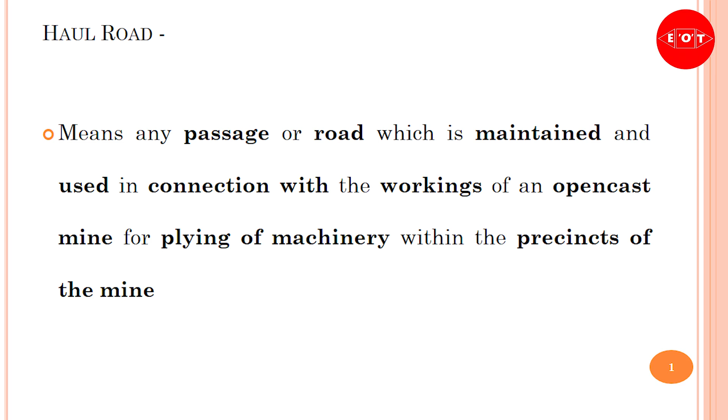Let us see some of the recommendations of the DGMS regarding the conditions of haul roads. Under the new regulation, a haul road has been defined. Haul road means any passage or road which is maintained and used in connection with the working of open cast mines for plying of machinery within the precincts of the mine. So this way they have given the definition also.

As regards the condition of haul roads is concerned, this is a compilation of various circulars and recommendations issued by DGMS. These have been compiled into about 11 points, and all of them are important as far as the condition of haul roads is concerned. We can expect a question on these conditions already issued by DGMS.

The first condition reads: all roads for trucks, tippers, dumpers or other mobile machinery shall be constructed to suit their load capacity. They observed that in many mines, formerly they used to operate with 50-tonner dumpers, and subsequently shifted to 100-tonner dumpers, which had an adverse impact on the maintenance of the haul road. So load capacity means the condition of the haul road shall suit the load capacity of the vehicles plying on it. It is very, very important.

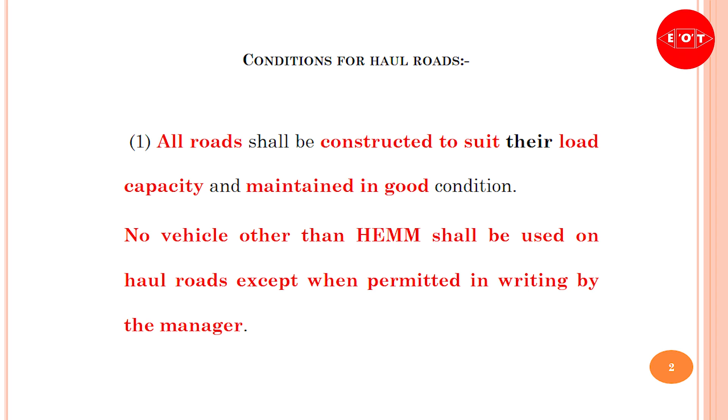Not only construction, but haul roads are to be maintained in good condition. Another important point is no vehicle other than an HEMM shall ply on a haul road, except at some designated points where light vehicles are permitted to cross the haul roads, with certain precautionary measures also to be adopted.

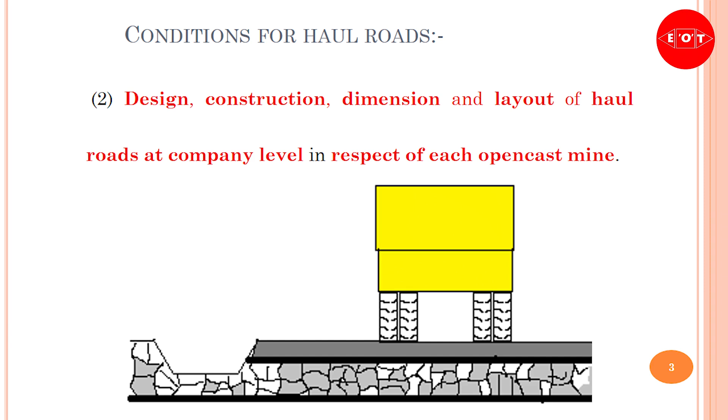The second point is regarding the design, construction, dimension and layout of haul roads. The DGMS recommendation is that whenever we lay down any design, dimensions and layout of haul roads, it shall be laid down at company level in respect of each open cast mine. We know what company level and site level mean. The site level is restricted to the conditions or specifications of a particular site only. But company level is related to all the mines under that company.

If there are more than one mines, then all haul roads should provide one-way traffic, and the width of the haul road shall be at least equal to the width of the largest machine plying on the haul road plus 5 meters. But if one-way traffic is not practicable, as could be the situation in some mines, the recommendation is that the width should be at least 3 times the largest dumper plying on the haul road, plus 5 meters.

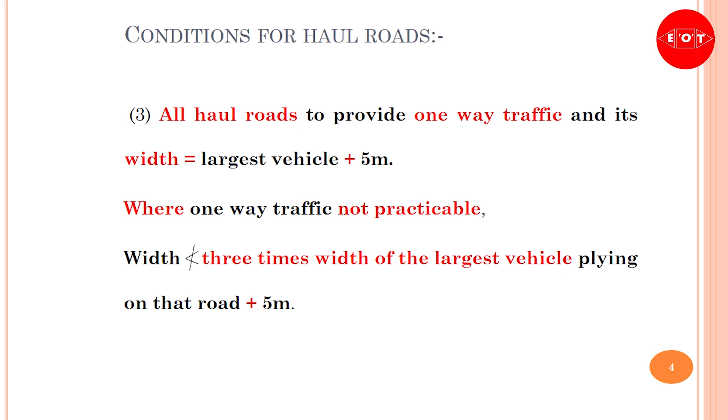This recommendation is based on the fact that the probability of head-to-head collision on a two-way haul road is more, and hence there should be sufficient width on such haul roads to maintain safe clearance between the to-and-fro traffic. The fourth point is very, very important.

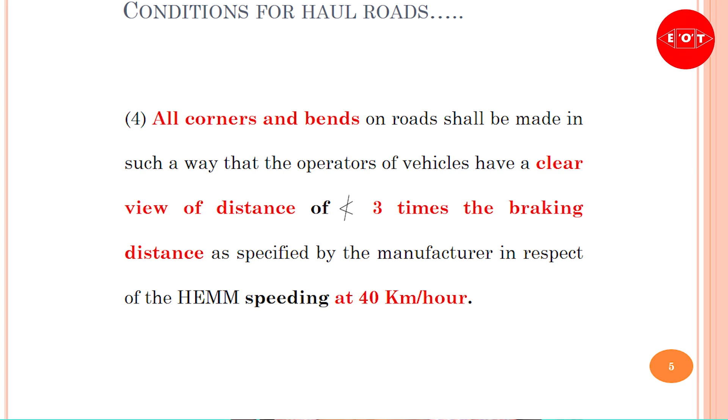That point concerns all corners and bends, because most accidents take place on corners and bends when the operator cannot control his vehicle. So all corners and bends on roads shall be made in such a way that operators have a clear view of a distance not less than 3 times the braking distance as specified by the manufacturer in respect of HEMM speeding at 40 km per hour. We can very much expect a question on this also. So it reads: all corners and bends shall be so designed that the operator shall have a clear view of a distance not less than 3 times the braking distance. We know that the braking distance is specified at every speed by the original equipment manufacturer.

That braking distance is verified by the engineer also at the mine, and a proper record is also maintained of all these things. This way we have to ensure the clear cut distance, and at times due to local situation it may not be possible to give a clear view of 3 times and all that. So in that case there is a provision.

What is that provision? If it is not possible to ensure visibility for that distance, then two separate roads shall be provided at the corners and bends, but the width shall not be less than 2 times plus 3 meter of the largest vehicle plying on the road. So when we are not in a position to give a clear view of 3 times the braking distance, we can have two separate roads, with width not less than 2 times plus 3 meter of the largest vehicle, a strong divider at the center, and adequate lighting and arrangement for reflectors.

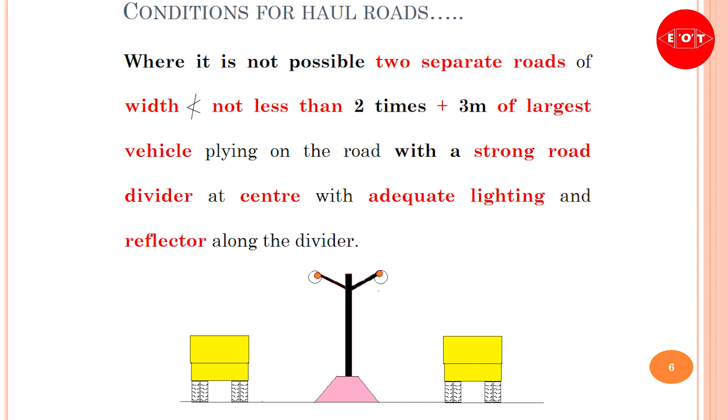Then fifth point is that as far as condition of haul road is concerned, no road shall have a gradient steeper than 1 in 16. Formerly they used to permit ramps of 1 in 10 and all that, but now they are also permitting ramps, though with some restriction. So gradient shall at no place be more than 1 in 16, because the more the gradient, the more difficult it becomes to control the vehicle.

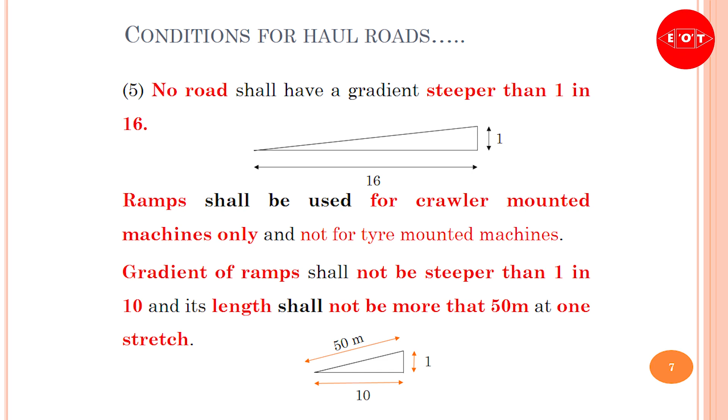As regards ramps, they say ramps shall be used for crawler mounted machines only. Tire mounted machines shall not be used on ramps. A gradient of ramps shall not be steeper than 1 in 10, and its length at one stretch shall not be more than 50 meter. So this is the condition.

Then the sixth condition regarding haul roads is that where any road exists above the level of the surrounding area - because we have seen incidents of dumpers falling from the upper bench to lower bench, from higher altitude to lower altitude, and many fatal accidents have taken place - to prevent that, whenever such a situation exists, the road shall be provided with a strong parapet wall or embankment, and the dimensions of the embankment have also been suggested by DGMS via this circular.

From an examination point of view, all these dimensions can very much form a simple question, but we should not miss the correct answer. What is the condition? Width of the parapet wall or embankment at the top shall not be less than 1 meter. That is one condition. And the width at the bottom, because the embankment itself needs to be stable - whatever parapet wall or embankment you are giving, it should be stable - so the width at the top shall not be less than 1 meter, and the width at the bottom shall not be less than 2.5 meter.

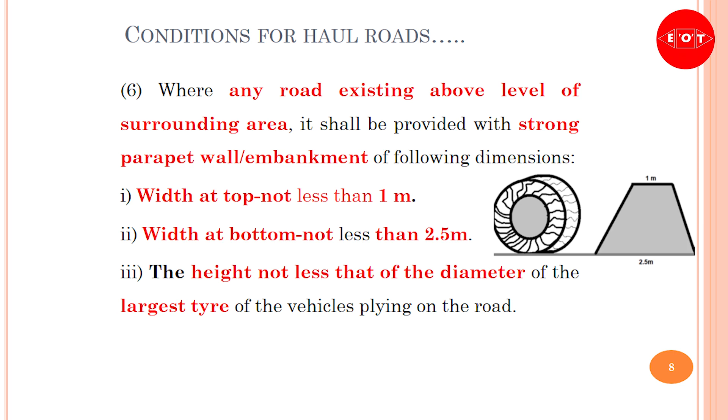As far as height is concerned, please remember the height shall not be less than the diameter of the largest tire of the vehicle plying on the road. This is the most important condition. So whenever we are giving some protection or embankment to arrest a vehicle, the condition is that the height of that embankment or parapet wall shall not be less than the diameter of the largest tyre of the vehicle plying on that road.

One important thing mentioned is that mere dumping of mud or overburden shall not be treated as a strong parapet wall, because at times there is a likelihood that we people at the mine may think we can dump a truck or two and be rest assured that no vehicle is going to jump down. But DGMS has clarified that this will not be considered a strong parapet wall. So we need to construct a strong parapet wall of the given dimensions.

Condition number 7 is that a separate haul road shall be provided for light vehicles, as we know that we need to go for inspection using light vehicles, and the maintenance crew, etc., also need to visit the mine in light vehicles and all that.

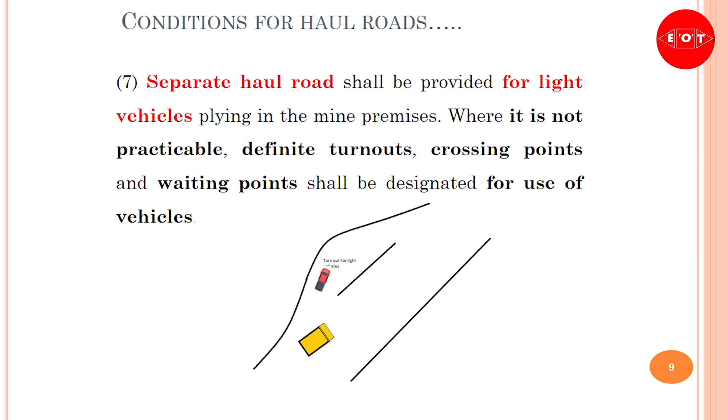Light vehicles are going to enter the mine, and it won't be very much possible to continuously give a separate road for the light vehicles. There are going to be situations when the light vehicle crosses the haul road or travels on the same haul road wherein big HEMM are also plying. So they have suggested definite turnouts. You have to provide a separate road for light vehicles as far as possible. When it is not practicable to give a separate road, you have to provide definite turnouts, crossing points, and waiting points for the use of the vehicles, provide traffic signals, etc., and frame standing orders from that point of view, because many fatal accidents have taken place where officials have lost their lives on haul roads due to collision with higher dumpers or higher capacity vehicles.

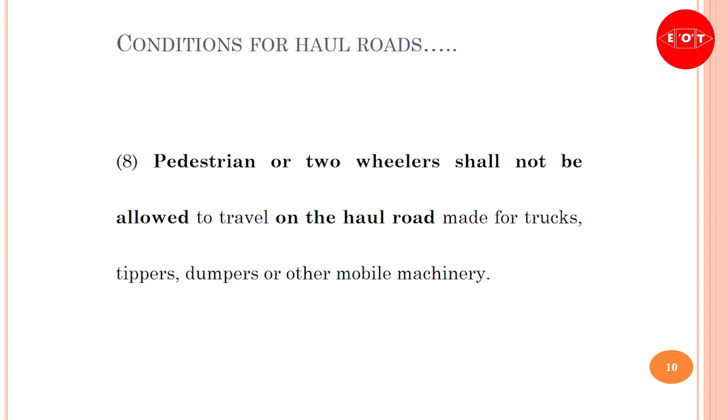Then pedestrians and two-wheelers. This is a very big issue as far as our mines are concerned, particularly whenever there is a village nearby or some public road passing through. There are many incidences when pedestrians or two-wheeler drivers occupy the haul roads, and we need to be very careful for that. Pedestrians or two-wheelers shall not be allowed to travel on the haul road made for trucks, tippers, dumpers, or other mobile machinery. This instruction is to be very strictly followed.

Then condition number 9 is related to road signs with fluorescent paint. We know that we are going to operate the mines 24 by 7. At times there are situations of fog and low visibility, or the dust is more and all that. In such situations, the road signs with fluorescent paint guide the operator to keep the vehicle on track. So at every turning point, in particular, road signs with fluorescent paint shall be provided for guidance of drivers, especially at night times.

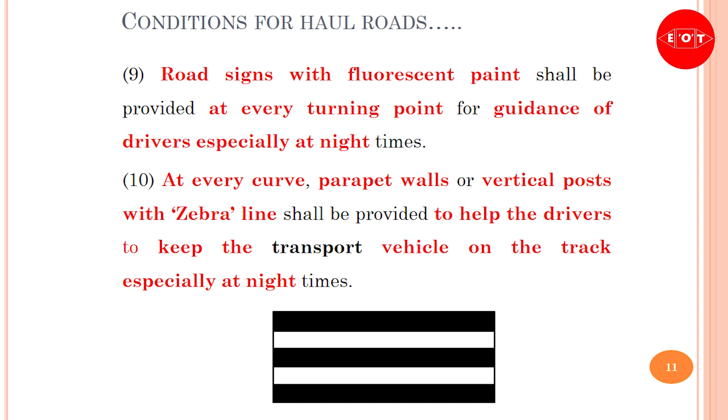Then condition number 10 reads like this: at every curve, parapet walls or vertical posts with zebra line shall be provided to help the drivers to keep the transport vehicle on the track, especially at night times. Whenever we are having a curve or a parapet wall, then vertical posts with zebra line shall be provided to help the drivers keep the transport vehicle on track.

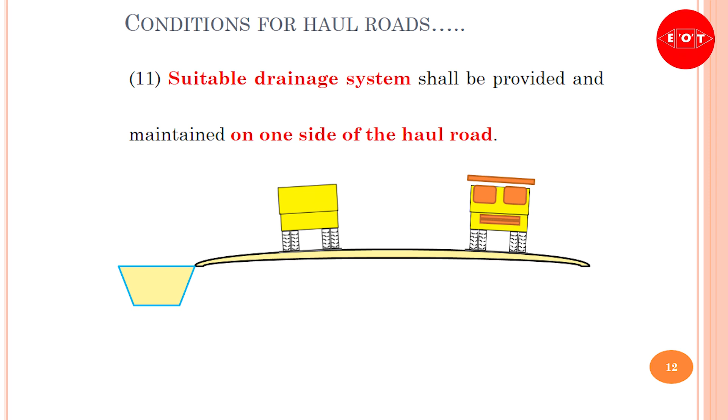Then number 11, because we have seen by experience that if the drainage arrangement on a haul road is not proper, maintenance of the haul road becomes very difficult. So point number 11 says a suitable drainage system shall be provided and maintained on one side of the haul road. These are some of the conditions which we must keep in mind, because these conditions can become a part of our questions whenever we are studying the mine workings.

So we were studying about the mine workings under Regulation 106, and you know that under the MMR not much has been given. That was the reason we covered some of the circulars wherein very important information has been circulated by DGMS. Now let us continue our study of the Metalliferous Mines Regulation.

The next important regulation from examination point of view is Regulation 108, which is regarding the powers of inspectors. Why are we supposed to know, as a manager, the powers of the inspector? We are supposed to know the powers of the inspector so that we shall give due respect to whatever instructions we receive from the inspector. We need to know what the powers of the inspector are. If you carefully read Regulation 108, you will find that this regulation is no less than Section 22, wherein the inspecting authority has the power to stop the work over there. Now let us carefully see what this provision reads.

Regulation 108, powers of inspector. If the provisions of Regulation 106, which we just discussed, meaning the chief inspector has granted us exemption on certain conditions, and if those conditions that were provided and expected from us to be observed are not followed, then in that case, if that is not complied with, the regional inspector may give notice in writing to the owner, agent, or manager, requiring him to take such protective measures within such specified time, similar to Section 22.

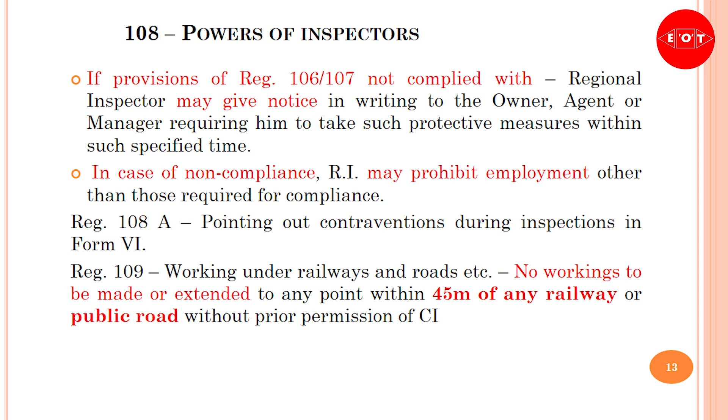Then regulation 109 is regarding working under railways and roads, meaning public roads, etc. It is a simple provision: no workings to be made or extended to any point within 45 meters of any railway or public road without prior permission of the chief inspector. So here the 45-meter part is important from our examination point of view.

Regulation 111 is one more regulation, working near mine boundaries. The provisions are that the owner, agent or manager shall have fixed boundaries of the mine, and these boundaries shall not be changed except with the permission of the chief inspector. And you know that whenever we change the boundary, we have to send notice to the chief inspector, the inspector, the district magistrate and all that. So under regulation 111, the owner, agent or manager shall have fixed boundaries.

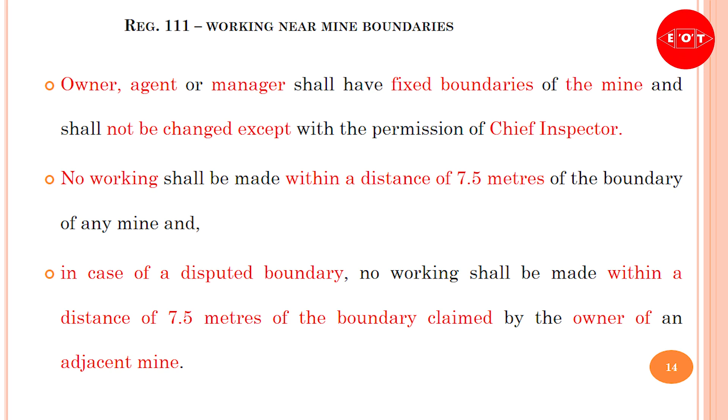Now here we need to again revise our concept about a mining lease boundary and a mine boundary. Mining lease boundary is the area granted for mining under the Mineral Concession Rules, whereas a mine boundary is the area fixed by the owner, agent or manager of a mine under regulation 111 of the Metalliferous Mines Regulations 1961. So this is the difference between the two.

Then, in working near mine boundaries, another provision is that no working shall be made within a distance of 7.5 meters of the boundary of any mine, and in case there is a common boundary and some dispute, no working shall be made within a distance of 7.5 meters of the boundary claimed by the owner of the adjacent mine.

Another provision, or rather it was issued via circular, and we should keep it in mind since we work in open cast mines. Working in river beds: at times there are river beds where during the dry seasons there is no water and there is precious mineral. So DGMS had in the past permitted open cast working in these river beds with the prior approval of the inspectorate, but the condition is that open cast work in the bed of a river may be carried out from 1st November to 31st May of the next year. So this is one of the things you should keep in mind.

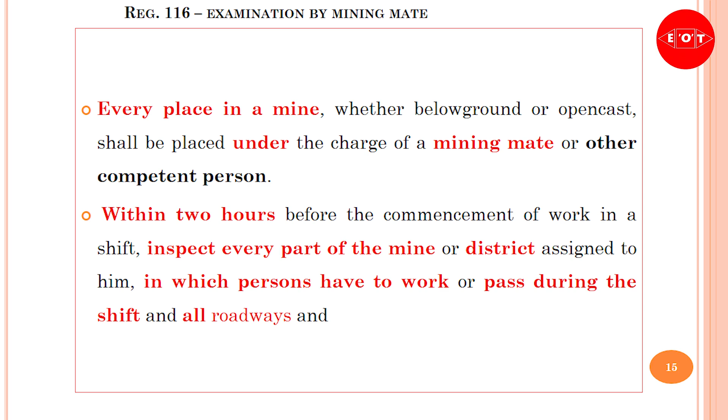And this mining mate who holds charge of that working place shall, within 2 hours before the commencement of the work in a shift, inspect every part of the mine or district assigned to him in which persons have to work or pass during the shift, and all roadways and working places where work is temporarily stopped. You know what a disused or unused working is. These are the workings where the work has been temporarily stopped.

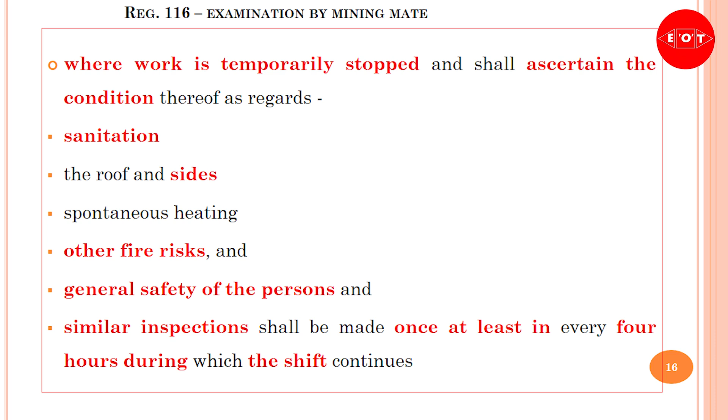So this mining mate or other competent person is expected to inspect that place also which has been temporarily stopped and ascertain the condition related to sanitation, then whether the sides are safe and secured or not, whether there is any other fire risk or not, and generally so far as the safety of the persons is concerned. And similar inspection shall be made at least once in every 4 hours during which the shift continues. So this also is the condition under regulation 116.

So if a question appears related to regulation number 116, then you must remember that within 2 hours the mining mate is supposed to inspect all the travelable parts and wherever persons are working, and similar inspection has to be done again once every 4 hours during the shift.

Regulation 119. This regulation relates to precautions against fire. Now we know that fire and inundation come under major hazards. Similarly, slide or slope failure is also one of the major hazards. So precautions against fire assume importance from our examination point of view.

Not much has been given in regulation 119, but we need to go through some of the circulars and make ourselves thorough with the AFDSS, automatic fire detection and suppression system. We can expect a question or two on AFDSS. Now let us see what the provisions under regulation 119 read. These are precautions against fire.

So one important provision: no oil, grease, canvas or other inflammable material shall be stored in any mine except in a fireproof receptacle, because we know that we are extensively using inflammable oil and diesel. So the storage of that is very, very important and it must be stored in a fireproof receptacle as per regulation 119.

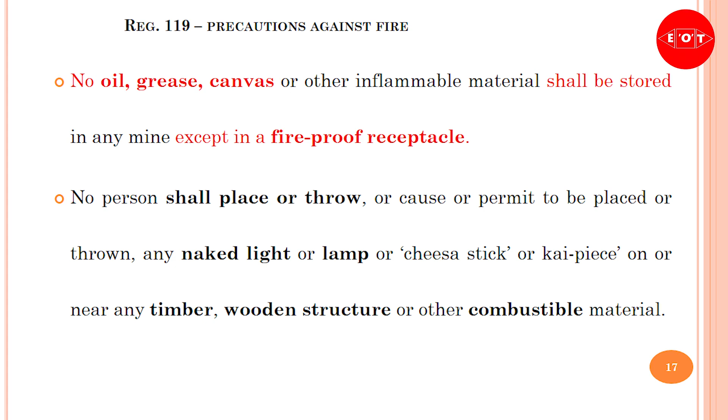Then another condition is that we know fire risk arises whenever some person inadvertently throws any lit matchsticks on material which is inflammable, where inflammable material has already been stored in huge quantity. So no person shall place or throw, or cause or permit to be placed or thrown, any naked light or lamp or cheesa stick or kai-piece on or near any timber, wooden structure or any other combustible material. This is the condition.

Then regulation 120. Now we need to be very much prepared if any fire takes place. So precautions after a fire has broken out. In case of underground mines, this is very, very important, but in opencast mines also, if a fire has broken out, certain precautions are to be taken. All persons except those required to deal with the fire shall be immediately withdrawn. No person shall be admitted in the mine until the fire or heating has been extinguished or effectively sealed off and the mine has been declared to be safe.

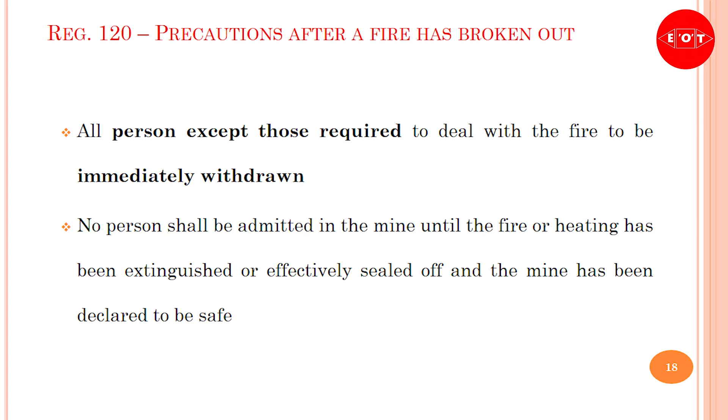Now these two things are very, very important. Whenever we are dealing with fire or conducting any emergency operation, we restrict the entry to limited persons whose attendance is very important. Regulation 121 is regarding equipment for firefighting, and we know that we need to maintain elaborate firefighting arrangements at our mines to deal with any emergency.

The regulation reads that a sufficient supply of clean and dry sand, incombustible dust in buckets, or a sufficient supply of portable fire extinguishers shall be provided. Where is it to be provided? At every entrance to a mine or district. Normally, wherever the check post is, where the security guard is checking gate passes and helmets, there itself we maintain a stock of fire extinguishers, which is as per regulation 121.

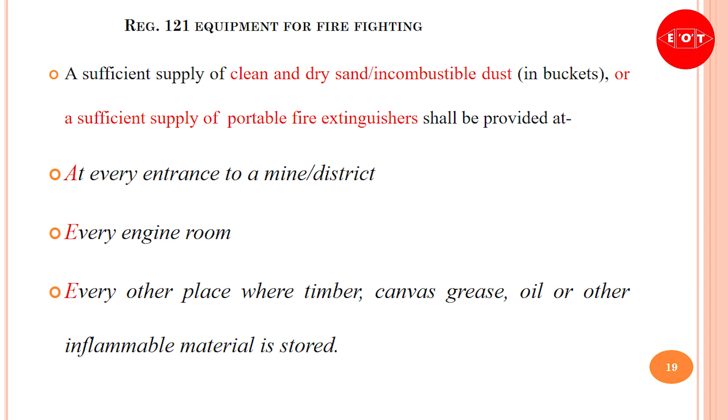Every engine room, if you have a haulage engine or any other such engine, you have to be ready with fire extinguishers over there. And every other place where we are storing inflammable material, timber, canvas, grease, oil, we need to provide fire extinguishers. And the most important thing to keep in mind is the soda acid type.

We know that there are three types of fire extinguishers, known as A, B, C. These are the ABC type fire extinguishers. And the D type relates to fires which involve inflammable metals. So A, B, C, D we can say, but mostly we treat fire extinguishers under the three categories only, which are A, B, and C.

And these A, B, C, if we want to remember what type of extinguisher is used where, you can remember the three states of matter. We know that the three states of matter are solid, liquid, and gas. So solid means any fire involving solid material like paper, wood, and all that, so A type extinguishers are useful. Whenever inflammable liquid is involved in the fire, then B type, and when gases are involved, then it is C type. And for metallic ores, if they catch fire, it is the D type.

But many have a confusion whether there is any E type extinguisher for electrical fires, but that is not there, because electricity is considered as the source of ignition and nothing more. So if electricity is the source of ignition, the material being burned could be solid, liquid, gas, or metal only. That is why we don't have any E type extinguishers. It is only ABC type extinguishers.

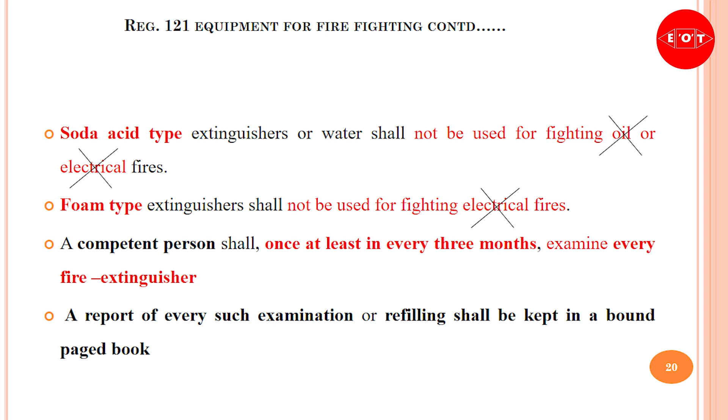Most important thing, we need to be always prepared, because we don't know where the emergency will arise. So for that purpose, we have to designate a competent person who shall at least once in every 3 months examine every fire extinguisher so provided, and shall discharge and refill it as often as may be necessary to ensure that it is in proper working order. Of course, this depends on the refilling instructions given by the original equipment manufacturer. And the report of every such examination shall be maintained in a bound paged book, signed by the person making the examination and countersigned by the manager.

In most of the vehicles we are using, we find that many incidents of fire in transport vehicles are taking place. The reason is that mechanization has increased, there are higher mining capacity vehicles, they are using high pressure hydraulics, and the motors are high amperage motors, accompanied by continuous operation resulting in heating of the equipment. There are constant vibrations and stress, and the mining environment is rugged, with dusty, muddy conditions. Malfunctioning and faulty maintenance at times may also pose a serious fire hazard to these equipment.

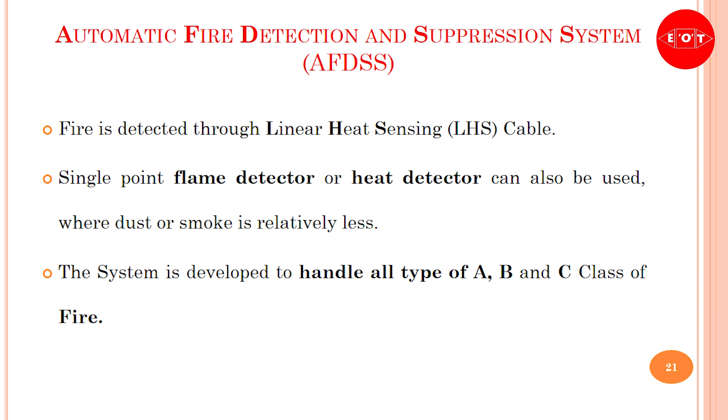So what we have found is this situation can be prevented by the installation and use of AFDSS. What is AFDSS? Automatic Fire Detection and Suppression System. On all diesel equipment, a semi-automatic or automatic dry chemical fire suppression system may be provided, is the suggestion of DGMS. Let us quickly understand the working and principle of this system. In AFDSS, fire is detected through linear heat sensing, known as LHS cable. A single point flame detector or heat detector can also be used where dust or smoke is relatively less. The system is developed to handle all A, B and C class fires.

This system basically consists of a control panel, an alarm speaker, and an LHS cable known as the sensor cable. Then it is pressurized, this is very important. The suppressant is pressurized up to 4 kg per centimeter square, or 60 psi. The main cylinder dry chemical powder is mono ammonium phosphate, with a CO2/N2 gas cartridge as expellent gas at 40 kg per centimeter square, which is 600 psi. There is a distribution system, a hose assembly, nozzles, and power supply, and if the coverage area is more, we can increase the LHS cable and the pressurized main DCP cylinder quantity.

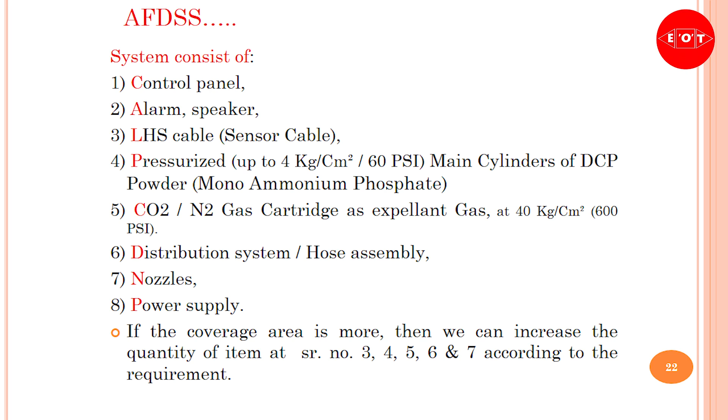The CO2 N2 gas cartridge quantity can also be increased, and the distribution system and nozzles etc. can be tailor made. The smallest system in this AFDSS contains one cylinder of 10 kg of dry chemical powder and 1 kg of CO2 as an expellant cartridge, along with 6 nozzles.

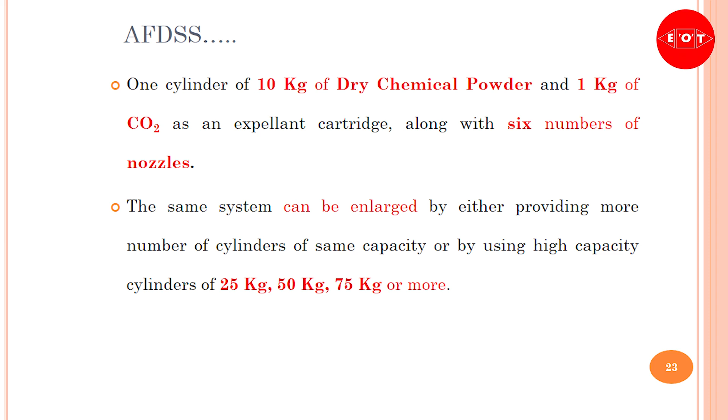The same system can be enlarged either by providing more cylinders of the same capacity, or by using high capacity cylinders of 25 kg, 50 kg, 75 kg or even more. Similarly, the number of nozzles can also be increased to 8, 12, 16 or more to cover a larger area, because these nozzles are pre-decided and directed towards the expected hot parts which are likely to initiate the fire.

These nozzles are directed towards those areas, and whenever the linear heat sensing cable diagnoses an increase in temperature, it actuates automatically, and those nozzles start showering the dry chemical powder on the areas which have already been predetermined.

The speciality of this system is that it works both automatically as well as manually, because we need to be ready with manual arrangements also. At times, if the automatic function has some snag, it can be overpowered by the manual system, which should override the automatic system. This provision is always kept.

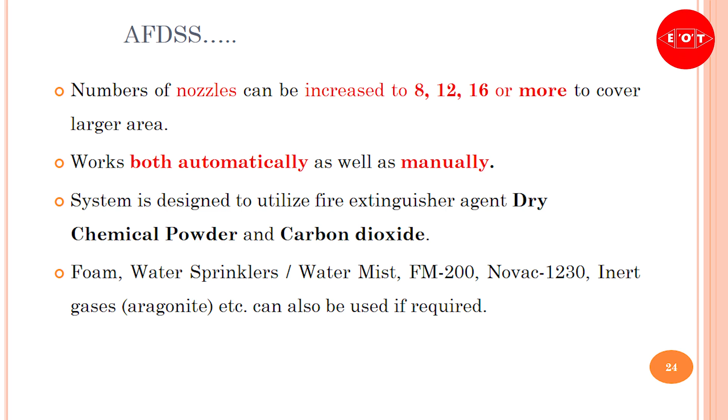The system is designed to utilize fire extinguishing agents like dry chemical powder and carbon dioxide gas. Other agents like foam, water sprinklers, water mist, FM200, Novec 1230, inert gases, Argonite, etc. can also be used if required. So this is the entire system.

Now let's look at the automatic operation, which can be termed option A. Before installation of the system, the fire prone areas have to be evaluated and marked, identifying the hot parts which are likely to initiate the fire.

Then the linear heat sensing cable and nozzles are installed with the help of suitable hoses in such a way that all nozzles are directed to the fire prone areas. These nozzles spray the fire extinguishing agent on the fire to suppress it.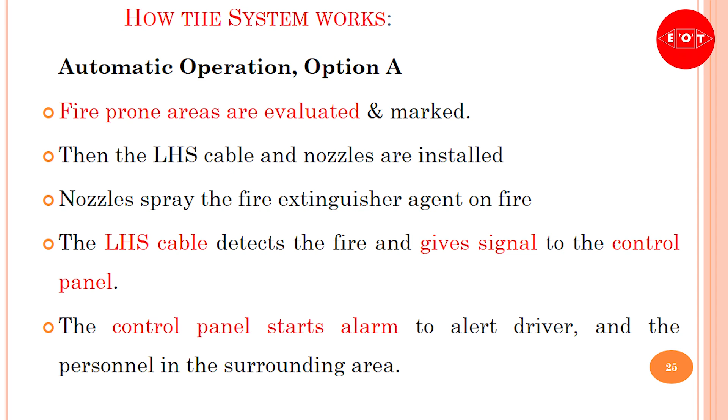At the time of fire, the temperature rises to 180 degrees centigrade or so. The linear heat sensing cable detects the fire and gives a signal to the control panel, and the control panel starts an alarm to alert the driver and personnel in the surrounding area. It also gives a visual signal on the control panel, and after a few seconds it energizes, or opens, the electromechanical actuator located between the expellant cartridge and the main cylinder.

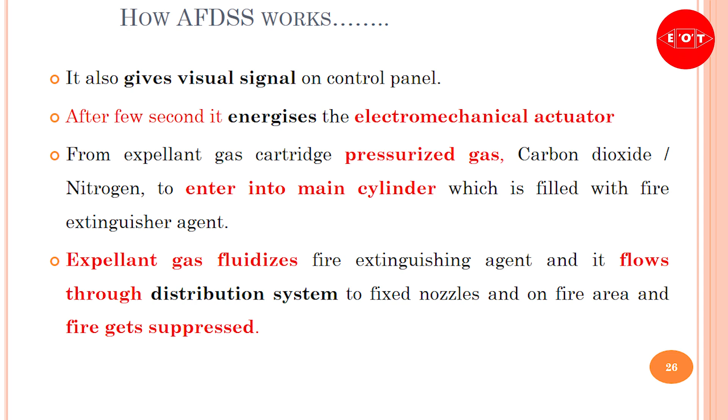From the expellant gas cartridge, pressurized gas such as carbon dioxide or nitrogen enters the main cylinder, which is filled with fire extinguishing agent. This expellant gas fluidizes the fire extinguishing agent, and it flows through the distribution system to the fixed nozzles and onto the fire areas, suppressing the fire. This is the automatic operation, termed option A.

There is also a manual operation, option B. In the event of fire, the vehicle driver can activate the system manually by operating the electromechanical actuator directly through a separate switch provided in the control panel, or by a knob, or a high pressure ball valve installed between the expellant cartridge and main cylinder. After this, it works the same as the automatic operation, option A.

To alert the people, an external alarm delivering a message in a human voice can also be provided.

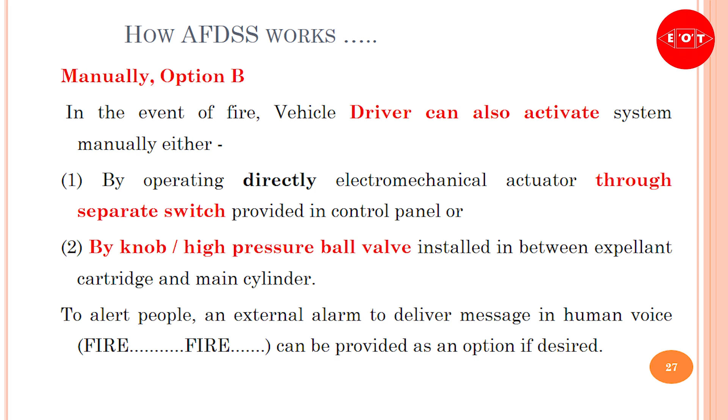In this part we have studied the precautions to be taken against fire in a mine, and also the conditions of haul roads and related matters. Let us quickly test ourselves with some sample MCQs.

The question is: recommended minimum width of a haul road with one-way traffic shall be. The options are: A, 3 times the width of the largest dumper plying on it; B, width of the largest vehicle plus 2 meters; C, 2 times the width of the largest vehicle plus 2 meters; D, width of the largest vehicle plus 5 meters; and E, 3 times the width of the largest dumper plus 5 meters.

Now these are the options given here. The minimum width of a haul road with one-way traffic, we know, shall be the width of the largest vehicle plus 5 meters. This is the minimum width.

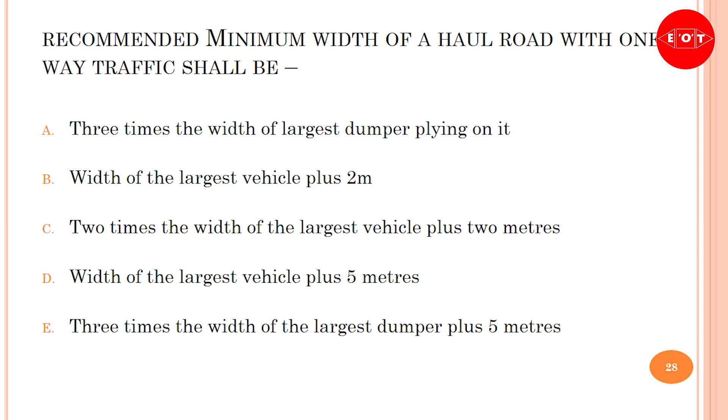Let us take one more example. Where the traffic on a haul road is two-way, the recommended minimum width shall be. Option A is 3 times the width of the largest dumper plying on it.

Then width of the largest vehicle plus 2 meters. Then 2 times the width of the largest vehicle plus 2 meters. Fourth option is width of the largest vehicle plus 5 meters. Fifth option is 3 times the width of the largest dumper plus 5 meters. We know that the answer is 3 times the width of the largest dumper plus 5 meters.

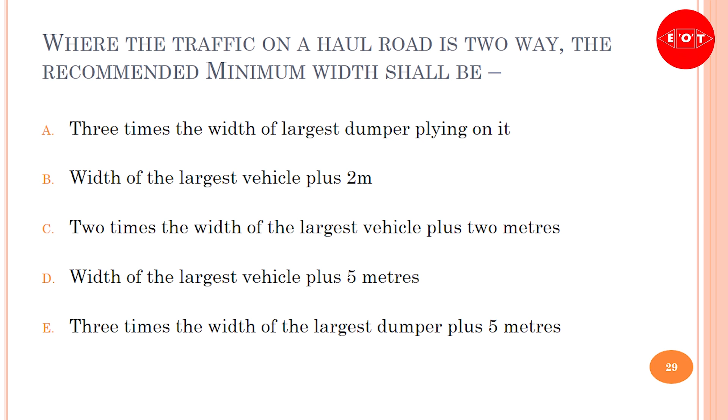Let us take one more example. Along the bends on a haul road, the operator shall have a clear view ahead at least. Option A is 30 meters. Option B is 3 times the braking distance at maximum permissible speed on the haul road. Option C is 3 times the braking distance of the HEMM speeding at 35 km per hour. Option D is 2 times the braking distance of the HEMM speeding at 30 km per hour. Fifth option is none of these.

We know that the answer is 3 times the braking distance of the HEMM speeding at 40 km per hour. Since it is not in the options, we shall have to choose none of these.

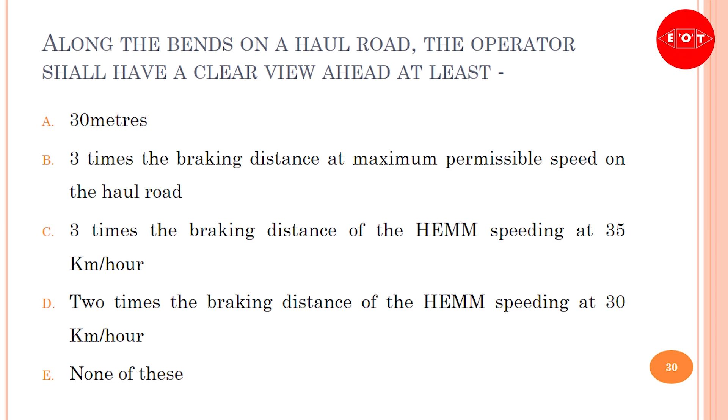One more example: at the bends where two separate roads are given, the minimum width of each road shall be. At times, it may not be possible to have a very wide cross section of the whole road at the bends, so there is a permission that you can have two separate roads, we know that. Now he is asking, at the bends where two separate roads are given, the minimum width of each road shall be. Option A is 2 times the width of the largest vehicle plus 3 meters.

Option B is 3 times the width of the largest vehicle plus 2 meters. Option C is 3 times the width of the largest dumper plus 5 meters. Option D is width of the largest vehicle plus 5 meters. Option E is none of these. We know that the answer will be 2 times the width of the largest vehicle plus 3 meters.

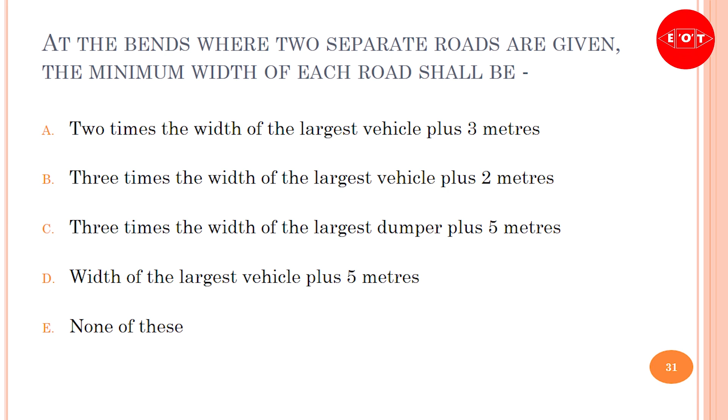One more question we can expect: Zebra lines are given along the haul roads at. Option A is every turning point. Option B is every curve. Option C is every parking place. Option D is pedestrian crossing point. Option E is all of these.

Here we have to be very careful. It is not all of these, because we don't give zebra lines at every parking place. Pedestrian crossing, no question arises. And at every turning point we do give fluorescent signs, road signs are given. So zebra lines are given on every curve, so we can choose option B.

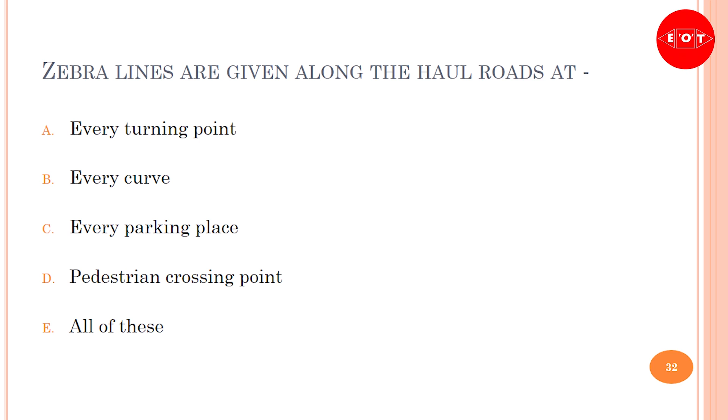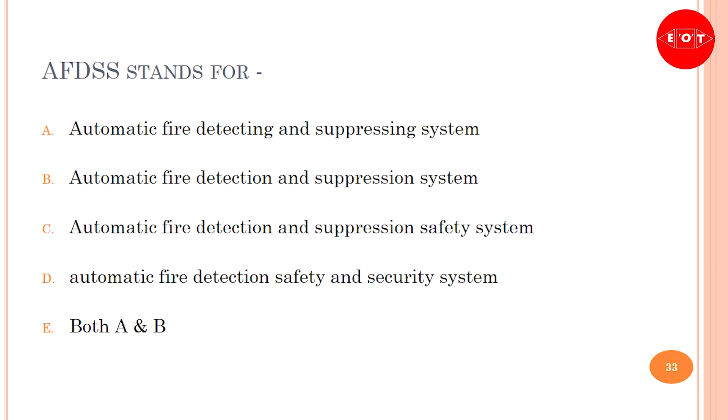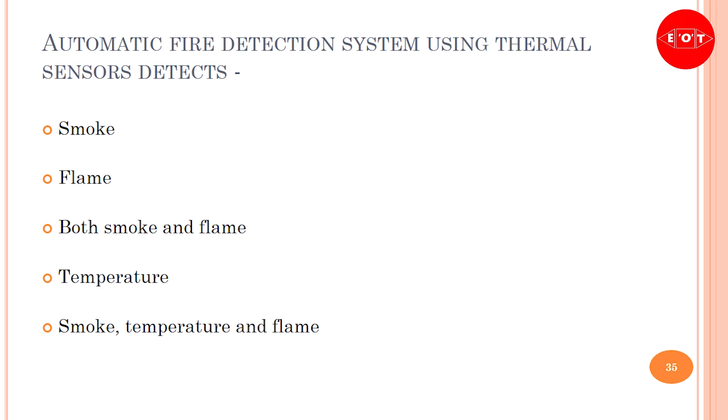One more question: Automatic fire detection system using thermal sensors detects. This means which AFDSS uses thermal sensors, so it detects: smoke, flame, both smoke and flame, temperature, or smoke temperature and flame. We know that there are two types of sensors, one is thermal sensor, another is optical sensor. So in this case, when they are talking about thermal, we should choose option D, which is temperature.

This way you too can visualize any MCQs and try to answer them so that the concept gets clarified. In the next video lecture, we shall elaborately study the provisions related to precautions against dust, because that is a very important chapter from our examination point of view, and a lot of things have come up. So in the next video lecture, we shall continue the study of Metalliferous Mines Regulations from precautions against dust.